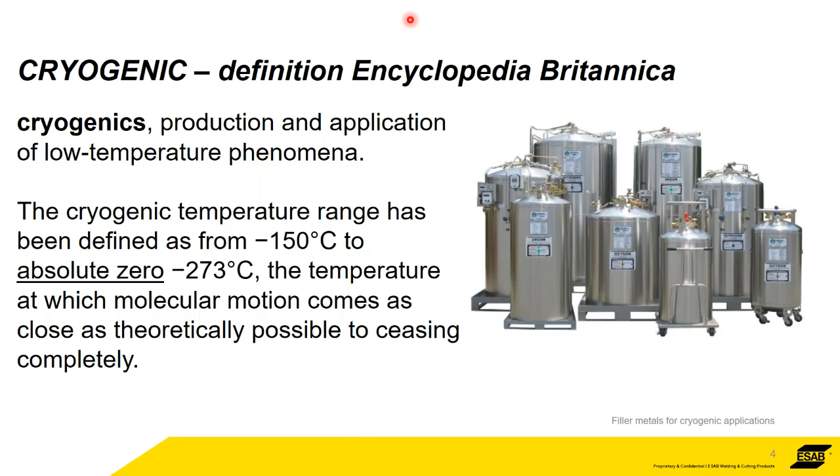The cryogenic temperature range is defined as being from minus 150 C, and it goes right down to absolute zero. You can't get colder than minus 273. That's the kind of temperatures we're talking about.

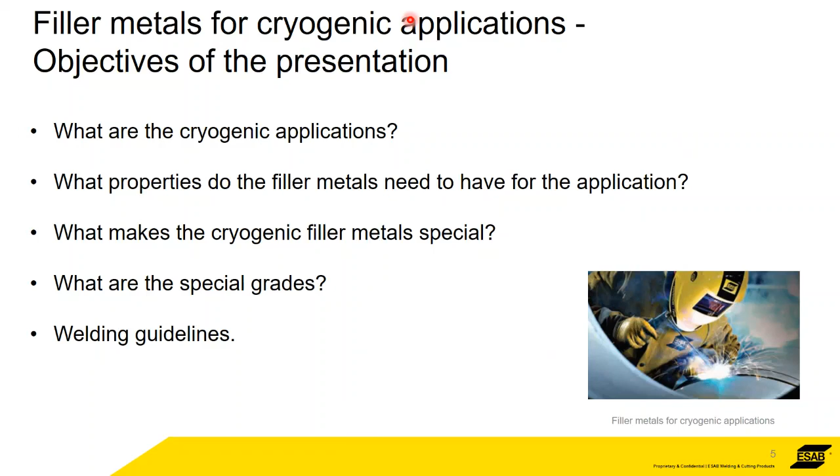What I want to do around the topic is present what cryogenic applications are, why we need to operate in temperatures so cold, and very specifically, what properties the metals—not just the filler metals, but the base metals—need to have for applications that are so cold. What's the difference between ordinary base metals and filler metals that makes the cryogenic ones so special? What are the grades? And obviously we're a welding company, so we will talk about welding. There are some useful pointers to be taken into consideration whenever you start welding for these applications.

Specifically for cryogenic applications, we're talking about the temperature of liquid oxygen—that's really when things start. From minus 150 to minus 273. The coldest element we're dealing with is liquid helium, which is down to minus 269. Minus 269 is a particular set of problems—you can't get much colder, and testing at those kinds of temperatures is quite difficult and not too common.

Why are we always talking about liquid gases? That seems a strange contradiction in terms—we're talking about a liquid gas. Why do we liquefy gas? The reason is very simple: it's for volume. The volume of oxygen gas is very, very much bigger than the volume of liquid oxygen. So that's why we convert the gases into liquids—it's to make it easier to store and transport.

And the applications that we're using this for are, not surprisingly, frozen food. LNG, liquefied natural gas, is one of the biggest applications in the world really for cryogenics, and that's purely down to the size of the business at the moment. Obviously, MRI type machines require a lot of refrigeration. Rocket fuel is particularly special, and what's becoming more and more prevalent these days is hydrogen power—the technology is really starting to come into its own, and we'll talk about that later.

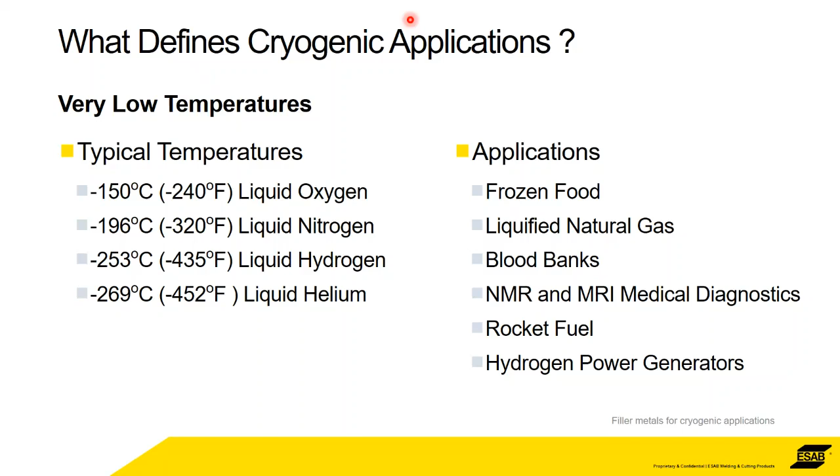Down to minus 100 C, we're talking about ethylene temperatures. I'll start at the top end: at 0, carbon steels and fine grain 2% nickel steels are absolutely fine, so we wouldn't class them as being cryogenic. When you're getting down towards minus 100, we need something a little bit more exotic, with a little bit more nickel in it to hold everything together. So the base material typically used down to minus 100 is something like a 3.5% nickel steel.

When you get down beyond minus 100, and we're talking liquid natural gas, it's very typical to use 9% nickel steel. That's got its own particular methods of production and its own particular requirements for welding. Beyond that, there is life beyond LNG temperatures, and again it's the four biggies: oxygen, nitrogen, hydrogen, and helium. Here you need something better than a 9% nickel steel, so we need to be talking about austenitics or these INVAR materials, which are 36% nickel, or even aluminium alloys.

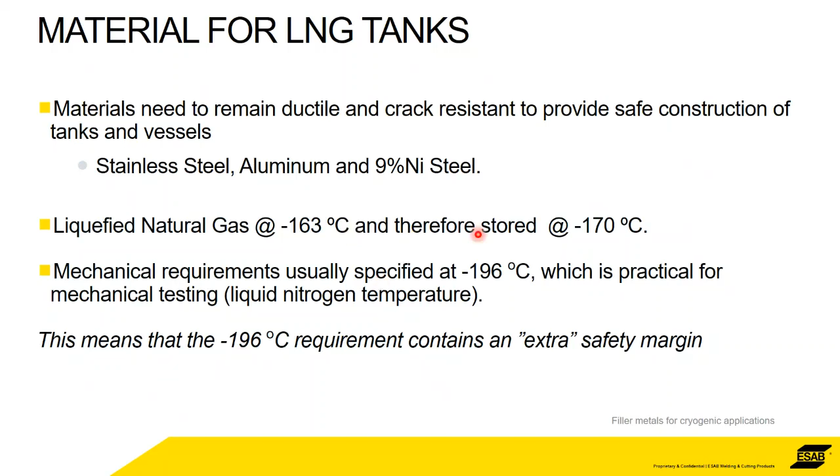So if we know that the properties of the filler metals and the base metals are all right at minus 196, then to handle minus 170 should be no problem at all, and that's what they do.

So the idea of using 9% nickel steel is it's a low temperature, economical alternative compared to something like a 304L stainless. Because it's high strength, you can reduce the thickness of the walls in the tanks. It's got enough strength to support, and 9% nickel can be welded without brittle fracture.

It's a low alloy content, like we said, so it's economical compared to 304L, for example. It is readily weldable, not susceptible to cracking, and shows little deterioration of post-welding properties. Preheat and post-heat treatment are not normally required at these kind of plate thicknesses, provided low hydrogen consumables are used.

One thing to watch out for that's not common - for someone operating in this kind of environment for the first time, this needs to be taken into consideration: magnetism. It can be a problem.

Handling and moving these plates around, you've a great risk of increasing the magnetism within the base material. If it's not possible to demagnetize, and there's a magnetic flux density in the steel, that can cause all kinds of problems when welding, specifically arc blow - the arc goes where it wants. So what we would recommend is a flux density below 20 Gauss. If it's above that and it's not able to be demagnetized, then AC welding would be recommended.

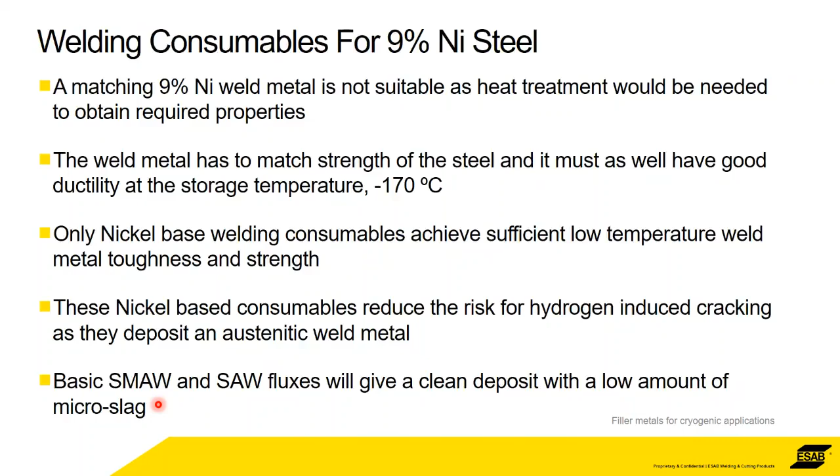Basic SMAW and submerged arc fluxes will give a clean deposit in this 9% steel. In terms of the specifications and requirements, ASME requires a yield strength of 690 megapascals, and the project spec we typically see is 70 joules, either 50 or 70 joules, at -196.

So which alloys are used for these 9% nickels? The main ones by far are either nickel chrome moly 3, nickel chrome moly 4 - so alloy 625 or alloy C276. These are the two grades that have been used extensively over the years. We've got lots of experience and literally hundreds of installations using either the nickel chrome moly 3 or the nickel chrome moly 4. The prevalence of 625, nickel chrome moly 3, is that it's really a commodity - lots of people manufacturing this grade at the moment, so it tends to be cheaper and more readily available than the C276.

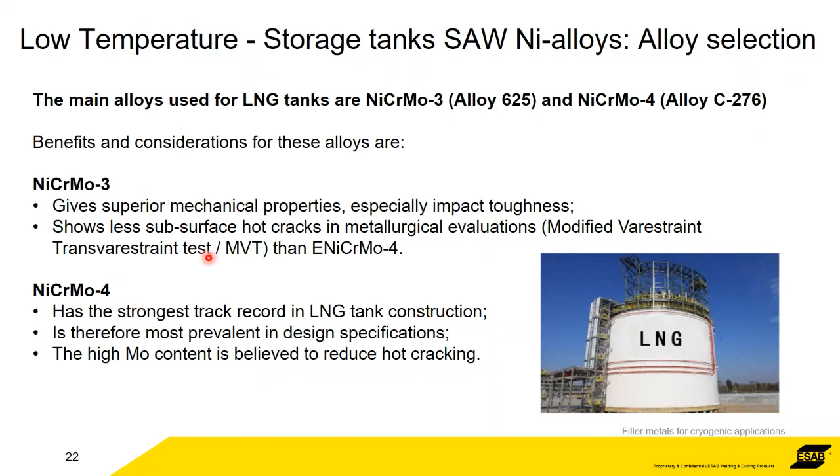But whichever you use is absolutely fine. In terms of tips and tricks for welding techniques, we would say absolutely use a filler metal. If you're welding nickel-based alloys, always use a filler metal - don't do autogenous welds without a preheat and without post-weld heat treatment. Again, something we say a lot: keep the heat input low. We always say that with stainless steels, duplexes, and nickels. Keep the heat input as low as possible, typically using a maximum of 1.5 kilojoules.

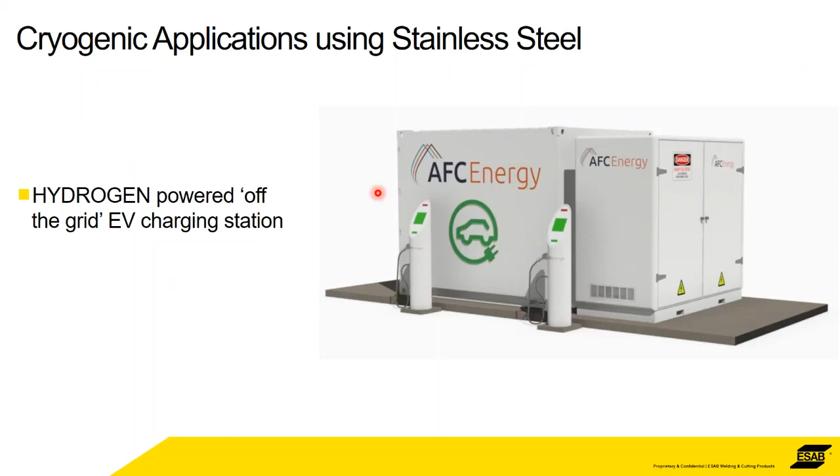Two grades that we have I particularly want to mention because they're quite special. We have a 19 12 3L cryo - it's a 316L, but with much lower ferrite than a typical 316L. The ferrite is normally between 2 and 5, but usually 3. With a ferrite number of 3, this means it's usable down to minus 269.

The Charpy value, the impact toughness at minus 196, is 70 joules. So this is certainly one of the materials of choice for hydrogen tanks.

The other grade I want to specifically mention is this 308. We've got a 308L grade. Again, at minus 196 it's 75 joules, so it's even better than the 316.

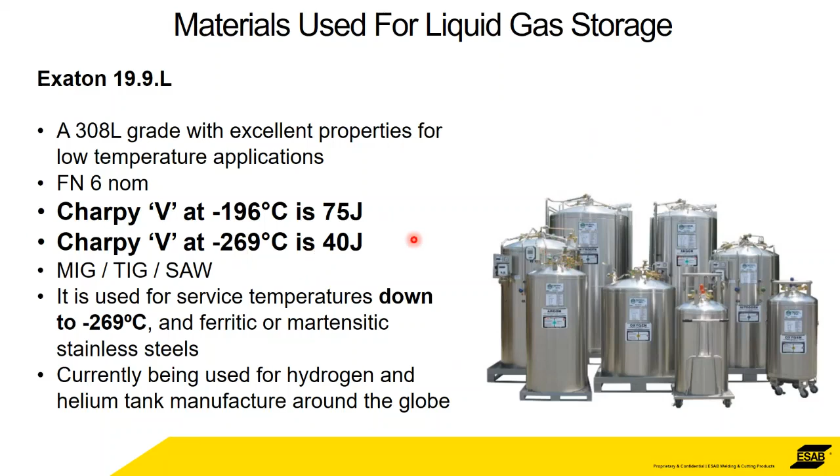So it's a practical solution for hydrogen tank applications. It's currently in use and becoming more and more prevalent.

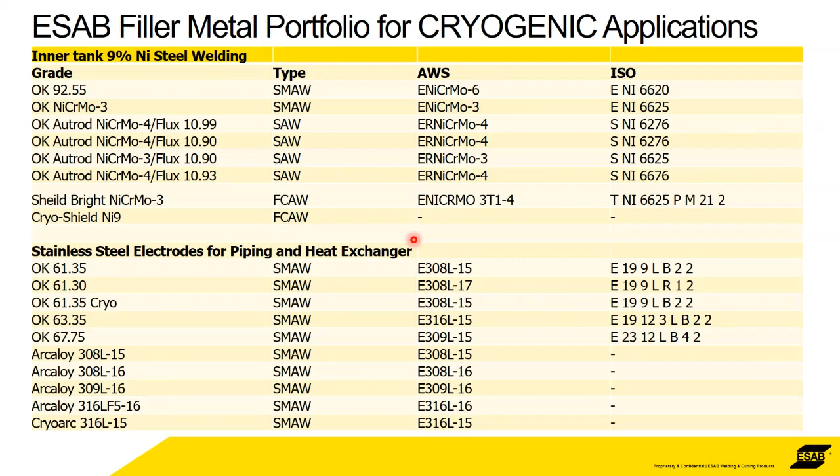Really, to finish off, I just want to list the portfolio that we have. All of these grades - I don't propose reading them all out, but obviously we've got MIG, we've got TIG, submerged arc, flux core, every welding option. And all of these are being used for cryogenic applications somewhere. So we've got a huge range of this.

Flux core, I mentioned, and submerged arc with fluxes as well.

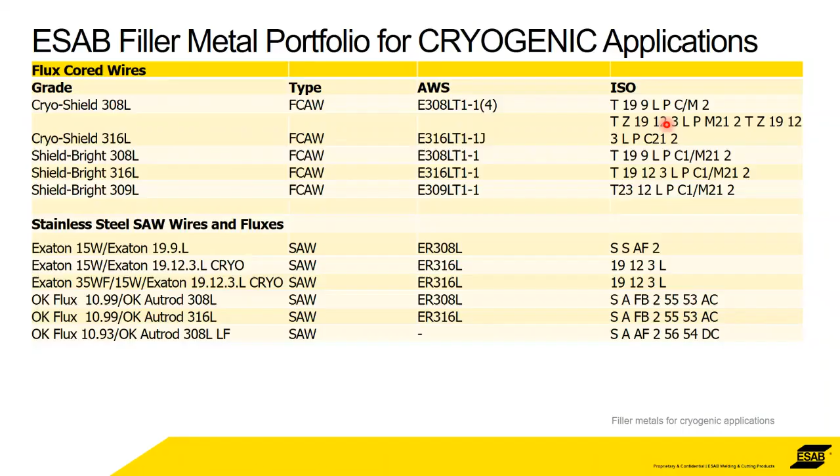I'll start with the first question: why are the nickel alloys prone to centerline cracking? Peter, Parocchi, what do you say on that? Parocchi, do you want that one? Go ahead, you've already explained that one in a very good way, so go ahead.

Because of the grain size of the nickel alloys - as I mentioned, the grain size is very big, and the number of grain boundaries is very small. So in terms of strength and toughness in liquid solution, these don't want to hold together, and they're very prone to impurities. Impurities would generally come from your base metal, so any traces of phosphorus and sulfur affect the microstructure even worse, and it changes the solidification temperature. So you have areas that basically don't solidify quickly enough to hold the weld together.

Does that explain it? Parocchi, you got anything else? Good enough, sir. Okay, good.

The next question: where can I get a copy of the LNG solution handbook? I believe it's available - I thought it was on the ESAB website. If anybody's having trouble, please drop me an email and I can sort it out.

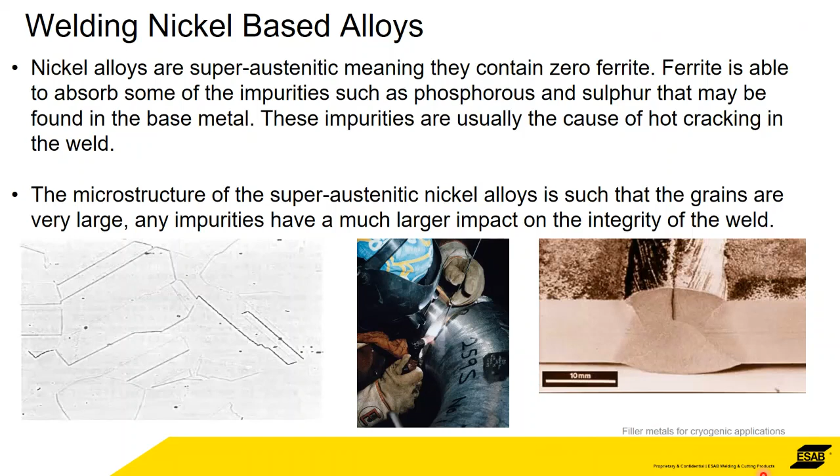Another question: which solution can be used to do the Charpy test at minus 269 degrees C? It has to be liquid helium, it's the only thing at that temperature. So you have to find a laboratory that can handle liquid helium, which isn't so common. Only a couple of laboratories here in Europe can actually do these tests. Also, when you take out the sample after the test, it will quickly warm up above minus 268.9, so that's the tricky part. You have to freeze every part of your equipment that it touches and freeze the environment. It's tricky and expensive.

I think we're coming to the last question: explain about basicity in submerged arc welding fluxes. It's not my forte. I'm not sure I understand the question, to be honest. The question is, what is basicity? Let's start with that. The higher you are in basicity in the flux, the higher the impact strength normally is.